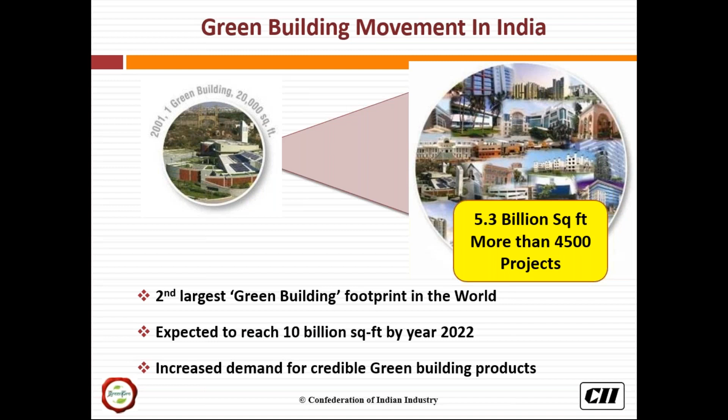Based on an estimate, looking at the futuristic trends by 2022, it is expected that the market potential of the green building materials and products, including the technologies which will go into the green buildings, is to the tune of 18 lakh crores. And we have very detailed, outlined calculations for this.

So in 2001, the trend was that many green building products and materials were majorly imported. And by 2018, many of these products are available in the country, and they have been identified also. So that's a huge plus for the developers, the facility managers, the procurement managers, architects, and green building consultants. So it is now the responsibility of each and every stakeholder of this green building movement to make an informed decision with respect to selection of credible green products.

Now I'll come to the topic of discussion, which is green construction block. And here I would just take you through a glimpse of autoclaved aerated concrete blocks, and it has been well established in the industry that AAC blocks are an excellent green product for green buildings. Now, what really constitutes an AAC block? The major ingredients are fly ash, cement, lime, alumina powder, and water. So the percentage of fly ash is significant in the AAC blocks.

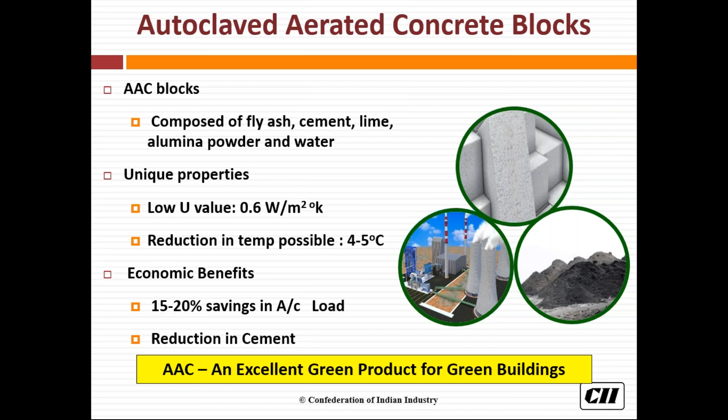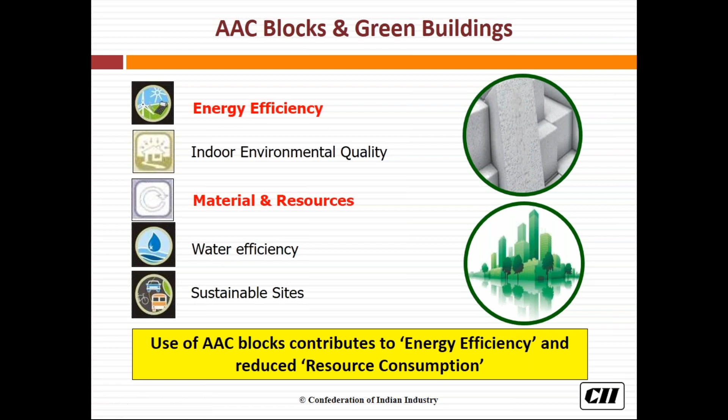So we're going to further look at all of these parameters of AAC blocks, but it is very important for us to relate these characteristics of AAC blocks with the overall impact that these blocks have for a green building, for the performance of the building. Now, these are typical requirements and typical aspects of a green building. The place where AAC blocks really contribute is on the energy efficiency front and on the materials and resources front. Use of AAC blocks contributes to energy efficiency and reduced resource consumption. This will be clearer for each one of us in the subsequent slides and presentations.

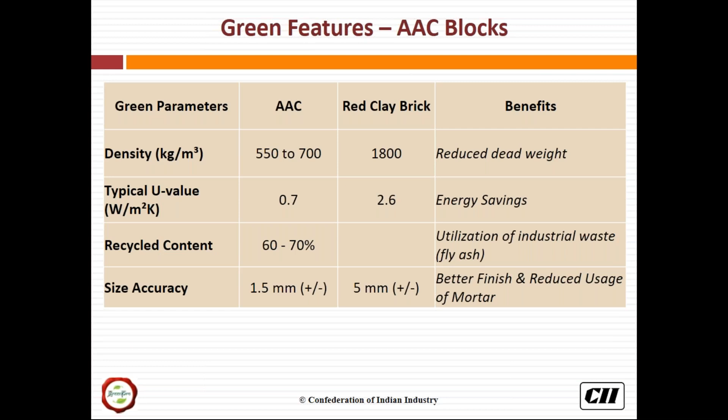The typical green parameters of AAC blocks over and above the functional requirements of AAC blocks are listed out here. I'll begin with the density part. So if AAC blocks are compared with any other construction block which is commercially available in the market, the lower density of these blocks offers reduced dead weight, which means that the amount of concrete and steel that goes into the building structures is reduced. So it really helps in reducing the resource consumption.

The typical U values that we are dealing with here are in the range of 0.6 and 0.8 watts per meter square Kelvin. Whereas if this is compared with a conventional red clay brick, it is way less compared to the U value of a red clay brick, that is 2.6, and this leads to significant energy savings.

If we talk about the recycled content, then fly ash constitutes about 60 to 70% of the overall content by weight. So the industrial waste content, fly ash, which is generated by thermal power plants, is being utilized in the block making process. Whereas in red clay brick, if we look at the major raw materials, the percentage of recycled content is way less.

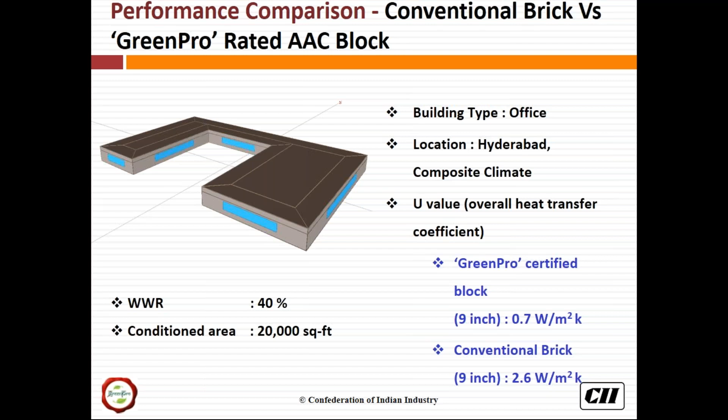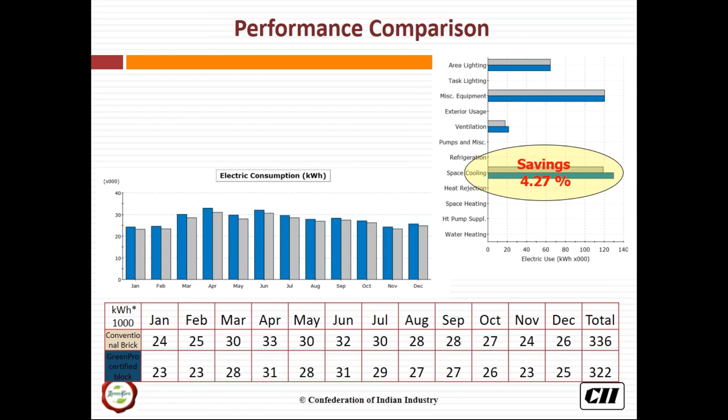We also did a dynamic thermal simulation study where GreenPro rated AAC blocks were used in a typical office space, and this scenario was compared with a scenario where conventional clay bricks were used. So in a dynamic thermal simulation tool, the overall energy consumption for the year was calculated. The net savings achieved were to the tune of 4.27%.

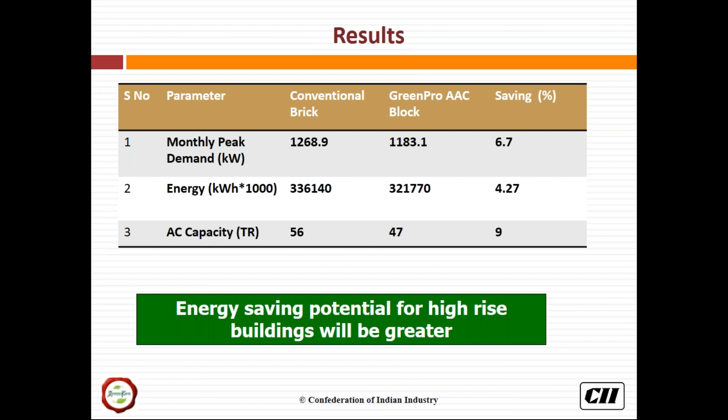And this was achieved as a result of reduced dynamic cooling load, and this led to an enormous amount of energy savings for a single floor office space. Now, if these numbers are further applied to a typical high-rise building, then the percentage of savings, or the absolute kWh of savings, would be even greater.

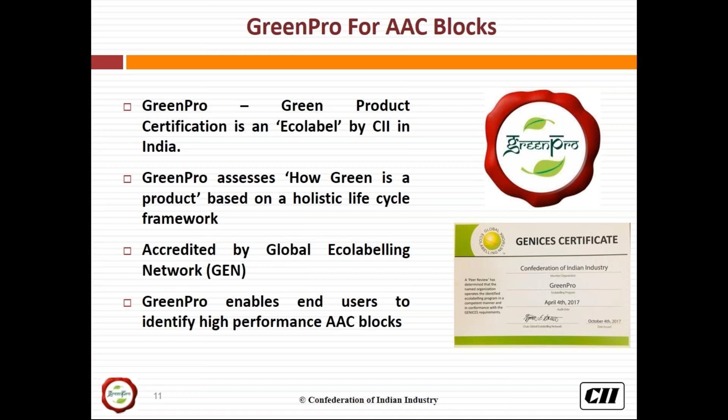Now, let me come back to how GreenPro identifies a block as a green construction block. So CII in 2015 launched the GreenPro initiative. GreenPro is green product certification, and is an eco label by CII in India. It assesses how green a product is based on a holistic product life cycle framework.

So across different stages of the product life cycle, the products are analyzed starting from product design stage to raw materials, product performance, manufacturing. So it's very important for the manufacturing process to be efficient, both in terms of energy, water, and waste management practices, and GreenPro also covers the additional aspects related to the manufacturer owning up additional responsibility. So it talks about innovation and product stewardship related initiatives.

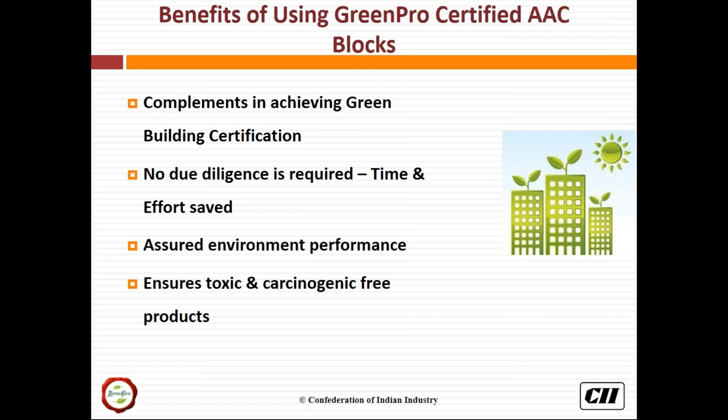Only after the minimum requirements of the GreenPro eco-label are met does the product get the certification. GreenPro rating is also accredited by the Global Eco-Labelling Network, for which we received the recognition last year. It also enables end users to identify high-performance AAC blocks or high-performance green construction blocks.

Now I'll be closing my presentation by taking you through the benefits of using GreenPro rated AAC blocks. It definitely helps the end users and the developers to achieve a higher level of green building certification, as it has additional credits associated with it. Also, for a GreenPro rated product, there is no due diligence required. So the time and effort that goes into due diligence related to selection of green products is saved.

There is third-party NABL accredited testing, which is part of every GreenPro rating. So the GreenPro product-specific rating that is available for construction blocks does address these requirements of third-party testing. Also, toxic and carcinogen free products are identified as part of GreenPro.

Even for an AAC block, the testing related to radioactivity and radiation levels is also part of the GreenPro rating. So it's not only the product performance and raw materials, but at the same time, GreenPro ensures that the health and well-being of the occupants of a building is also encouraged.